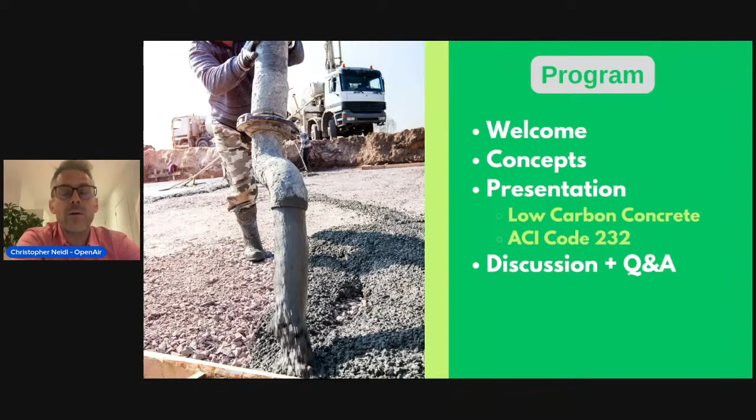So who we have today, Brian might be on already. I'll let him in one second, but we have an amazing panel of folks who have a lot of expertise, practical expertise in this subject and kind of live it every day. Professor Matthew Adams, who you're going to hear from in just a minute, is going to give us our presentation.

Is a longtime collaborator of mine. We've worked together for, I don't know, Matt, probably going back 4 years at this point. He has many different roles, including is really the chair of the relevant committee that developed this code at the American Concrete Institute, which I'll tell you a little bit about. He's also an associate professor at NJIT, and he runs a lab there focused on sustainable cement and concrete.

Kerry Sutton is a senior director at ACI as well, also an engineer, and is really responsible for educating, outreach, and trying to get this code implemented. So we're going to hear a little bit. She will weigh in on some of the technical aspects along with Matt, but can really sort of talk about the steps that are involved in actually implementing a code.

And then we're really thrilled to have Brian Reyes, who's the senior circular economy coordinator for the city of San Francisco's environment department. But prior to that, he was actually one of the key figures who was involved in developing a predecessor program, the first in the country, that Marin County, California, actually came out with, I believe, back in 2019, that was the first to actually introduce low embodied carbon concrete in the building code.

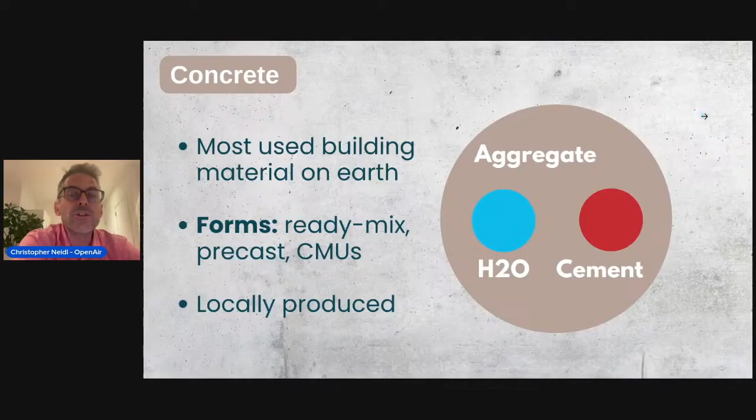It's also the key part of the discussion when we talk about the impact of concrete from a climate perspective. Cement, if it was its own country, it would be the third largest emitter in the world. It accounts for about 8% of emissions. And it's about, depending on the mix, some have more cement than others, but if you take an average, about 90% of the carbon emissions that are associated with concrete trace back just to that one ingredient, cement, which often is relatively small proportionally relative to those other ingredients.

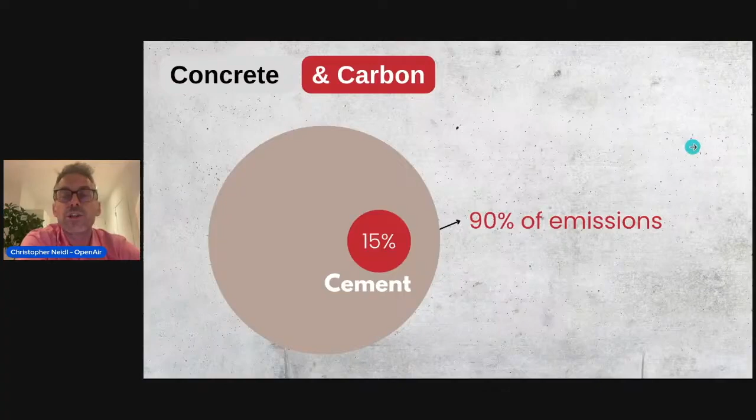A couple of concepts that we're going to be talking about that are important. There won't be many of them, but one is embodied carbon. So some people might, when they think of carbon emissions, think of smoke coming out of a tailpipe or out of a smokestack, and associate it with using things that use energy. That's called operational carbon. Here we're talking about embodied carbon, and with materials like steel and asphalt and glass and concrete, the emissions associated with them are not in their use, but rather in how they're made. And so that's the carbon that's sort of embodied in the process of actually making the concrete before it's actually laid.

And then related to that, ways in which we measure embodied carbon, which we'll be talking about, GWP, or global warming potential. This is a numeric value that basically equates to the kilograms of carbon per cubic yard of concrete. And this is a number that we use to sort of rate all sorts of materials and products, but certainly for concrete, a higher GWP means there's more embodied carbon, and a lower one means less, and that's what we use sort of as our tool of measuring progress or compliance.

Quick thing here, in terms of what we're talking about, are what are the ways in which local governments can be linked to decarbonization? What types of policies or programs or practices can they play the biggest impact? Certainly procurement is one that I've worked on a lot. Governments, local, state, and national, buy a lot of concrete for public infrastructure, buildings, bridges, etc. And somewhere up almost over 30% of all concrete is purchased and used by the public sector. So the governments of all kinds have power in the way they procure concrete. They might mandate that there's a certain GWP or embodied carbon threshold that they reach, or incentivize producers to pursue lower mixes or lower varieties for state work. And we'll talk about that in some future date. It's a really, really important, very active area of concrete decarbonization policy.

But what we're going to talk about today is more broadly in the neighborhood of different regulations, right? And so cities and states often play a really important role in evaluating materials and approving them, those that can actually be used. But the one we're going to be talking about today is the regulation of building codes, how buildings must be built, which has many different facets to it, but concrete is right there. And what we're going to be talking about today is how building codes, the parts that pertain to concrete, can actually now include limits to global warming potential or carbon. And that is the subject of today's conversation.

To spell it out a little bit, there are different varieties of this, and we're going to focus particularly on the ACI code that came out in November. The idea is that in buildings of different sizes, different construction projects that use concrete, the building code establishes a kind of maximum threshold for global warming potential that must be met as part of the building process. That's what we'll be talking about today.

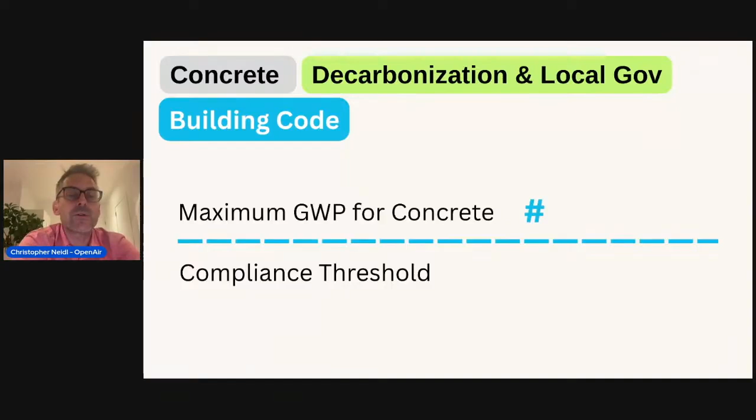It's important to point out, for those of you in California or Colorado, and maybe soon New York City, which has a bill pending right now that would add maximum embodied carbon requirements to a host of different building materials including concrete, these other programs like CalGreen and the soon to be implemented Model Green Code in Colorado aren't exactly the same, but they have similar enough designs that what we discuss today, some of the practicalities of implementation, will be relevant to you if you're in either of those states.

What we're going to do, I'm going to hand it over to my friend and our guest today, Professor Matthew Adams. He's going to talk first about defining, in practical material terms, what low embodied carbon concrete or low carbon concrete is, which is really important when thinking about what we're asking of builders if we were to implement such a code. Then he's going to get into what the code actually calls for and what is contained within it. After that, we're going to get into a discussion that will include you.

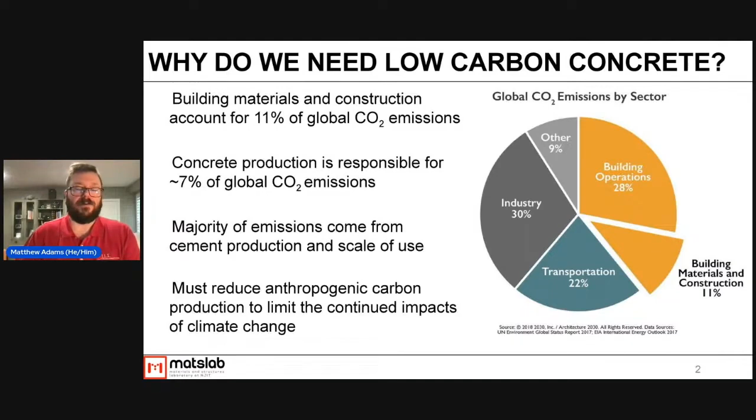The issue here is that we have other sources of CO2 that we're producing at a greater scale, and also we're not constructing nearly as much as some other countries, such as India or Brazil or lots of places in Africa. Despite that, we can still do better. We can reduce our carbon production associated with concrete. And a lot of the technologies and methods that we develop end up getting exported out to other places around the world, and we're also importing ideas from around the world as well. So this is really a collective effort of researchers and policy folks from around the world that we're working with to bring in some of the best ideas.

So what is low carbon concrete? It's a term you've probably heard if you've been here before. Until the code, there really wasn't a set definition for what low carbon concrete is. In reality, it's a performance requirement that is set by your licensed design professional, or LDP, and it's based on reducing your global warming potential below a threshold.

So in order to do that, you have to define a benchmark. You have to set your threshold of where you are in terms of GWP, and you need to define a reduction level. Once you hit that reduction level, you have what is called low carbon concrete. This number can vary because what is low is relative to your particular location. As Chris mentioned, concrete is somewhat necessarily a local material, so the tools we have to make concrete in one part of the world, or one part of the country, are different than in other parts. Concrete can vary quite a bit from location to location, so what is considered a lower carbon system in, say, New York City may not be possible to make in certain parts of North Dakota or northern Canada, for example.

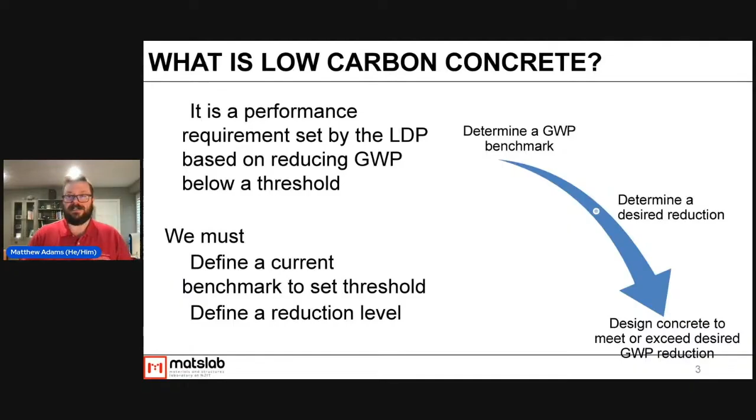So how do we get to low carbon concrete? Like I said, it's a design goal. There are lots of levers and knobs that we can simultaneously use to reduce embodied carbon. Much of this is going to be subject to local availability and cost, so what is available in your local area matters, and working with your local manufacturers is really important. When we're changing from standard practice systems to newer systems, it really requires knowledgeable folks along the entire construction chain - not just the engineers designing it, but our contractors, our suppliers, and all the laborers out there placing the concrete. Everybody needs to understand some of the differences.

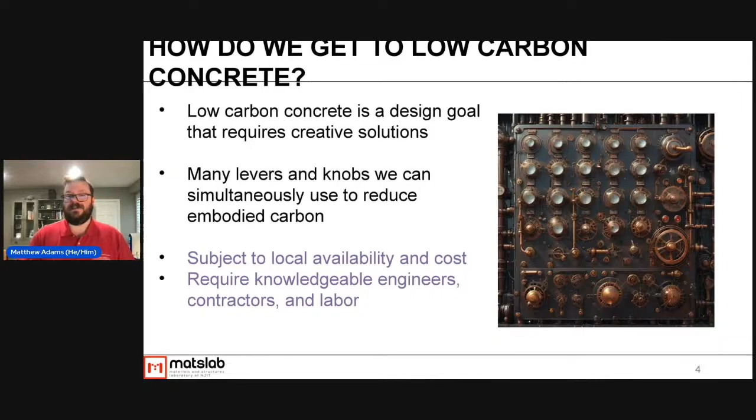If we think about concrete as a cookie - you have your regular chocolate chip cookie, and we can think of concrete in that way. In a chocolate chip cookie, you've got eggs, flour, and butter. These are our glue or our binder that hold everything together, similar to concrete where we have cement and water. When cement, or Portland cement, mixes with water, it does a process we call hydration, and it glues everything together - it hardens up and binds it all. In our cookies, we have filler and flavor - that's sugar and chocolate chips. In concrete, that's sand and gravel. We use as much sand and gravel as we can because it's cheaper than cement, and it also has lower embodied carbon. Then we have modifiers, such as baking powder and baking soda in cookies. In concrete, we use a lot of chemical admixtures and perhaps some mineral admixtures. These help change some of the properties.

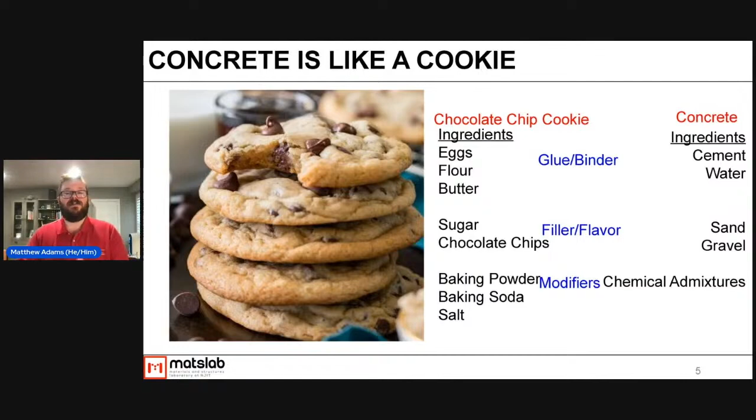Like a chocolate chip cookie, though, there isn't just one way to make concrete. We can change out all of our filler and flavor, and we can change out the types of binder ingredients we use. There are lots of different tools out there that we can use, and by making some of those changes, we can start to see reductions in carbon emissions.

Sorry, I lost an image on here - it went away. But basically, this image should show a bag of cement, and it should say lower carbon binder systems is one way. There are many different types of binders we can use outside of just straight Portland cement, and these can have lower embodied carbon. These might include replacing part of the cement with waste materials like fly ash, which is a waste product from coal burning, or slag, or ground glass. This can also involve complete replacement of the binder with something else - we see this in what are called alkali-activated systems or geopolymers. We also see other types of materials like calcined clays, and biochar is starting to get a lot of attention lately.

So that's one way we can reduce emissions, by replacing high-emitting cement with materials that emit less or are waste products. We can also work on reducing the overall binder content, the total amount of cementing materials, by increasing aggregate content. That requires engineering our aggregates to understand how they fit together. The more we can pack aggregates into the system, the less glue we need to hold them together. Finally, we can use more recycled materials in concrete, things like recycled aggregates, glass, and plastics. These are all being studied for use in concrete, with some further along than others.

I do want to point out that you need to be careful, though. There are a lot of folks out there selling carbon-negative or carbon-zero products that are magically going to reduce the carbon in concrete. These all come with pros and cons. They're going to change some properties of concrete, whether that's how it's placed, how fast it sets, or how fast the bleed water sets. You really have to understand that before you go and use them.

The issue is that a lot of these policies are great, but they're all being developed independently of each other, and so there's a lot of variation in methodology. Most of them are requiring what we call prescriptive limitations, so they're really stifling innovation and flexibility within concrete design.

Additionally, some policies are being proposed that list really unrealistic or unattainable long-term goals. Like I said in the last slide, we don't really have a method of getting to zero carbon yet. Net zero is a different question in terms of buying offsets - that's outside my realm of expertise, whether offsets work or not. But we don't have the tools in place to get to zero right now.

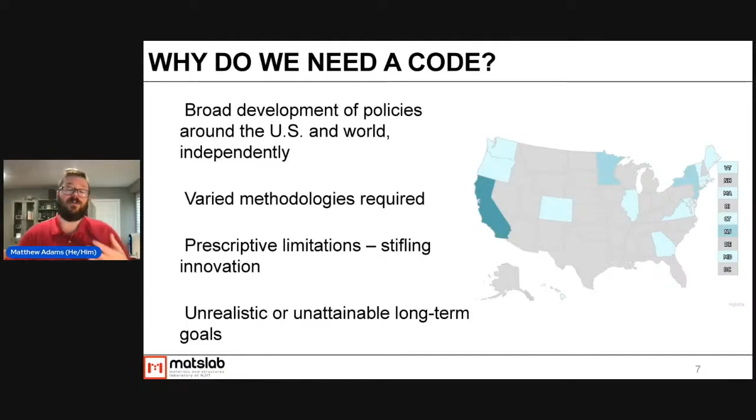And so we're seeing policies being proposed that say by 2040 or 2050 we're going to get down to zero carbon associated with concrete. We want to be really careful about policies like that, because when we put in policies that are not attainable, they end up just getting ignored. So we want to move forward with realistic and attainable policies.

So this led us to developing this code. The need for it was out there as we're seeing people trying to work on how to get to this, how to set requirements. This code is the first of its kind in terms of model building codes worldwide. It followed a consensus process, meaning we had a group of people come together and agree on best practices. Once we had approval within the American Concrete Institute, it went out for public comment.

And during that consensus process, we have to not just look at every public comment that comes in, but respond to every comment that comes in. So we can't just look at it and ignore them - we need to have a response.

This code provides designers with a method of setting GWP requirements for concrete associated with their project. Currently, the code only applies to ready-mix concrete within a strength range of about 2,500 PSI to 8,000 PSI. We're looking to expand that - hopefully we will include precast in the next round.

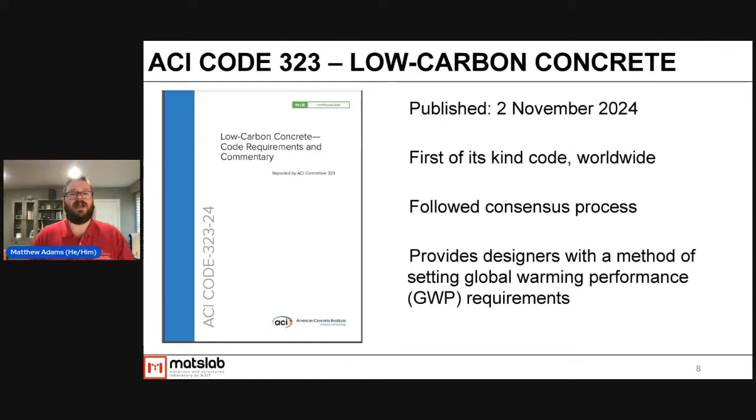The reason why we were limited was, one, we limited the scope to get something out quickly because the need was there. And two, there's a real data issue in terms of setting benchmarks and thresholds. We don't have a lot of widely available data on the global warming potential of concrete that's currently used and really project-specific global warming potentials. There's lots of great industry-wide and national averages out there, but that's not really good data in terms of getting a realistic picture of what's out there.

There are three main ways that we see limits being set for carbon emissions with concrete. One is called what we call carbon limits. A second is a carbon budget, and a third is a weighted carbon budget.

A carbon limit sets a global warming potential limit for each class of material, meaning on a regular concrete project, you can use 10 to 15 to 20 different concrete mixes. Each one of those mixes will be required to be below a specific GWP threshold. Those limits are easy to set, but they reduce flexibility in design, and often they can lead to increased volumes.

Generally, we assume that the higher the strength of a concrete, the higher the GWP. And so what we see when we say that all concrete has to be below a certain threshold is that people just increase the amount of concrete that they're using to offset having to use a slightly lower strength. This area is really where most of the policies nationwide are right now. Again, it's a good first effort because it's fairly easy to access and get some data to set this, but it does lead to low flexibility.

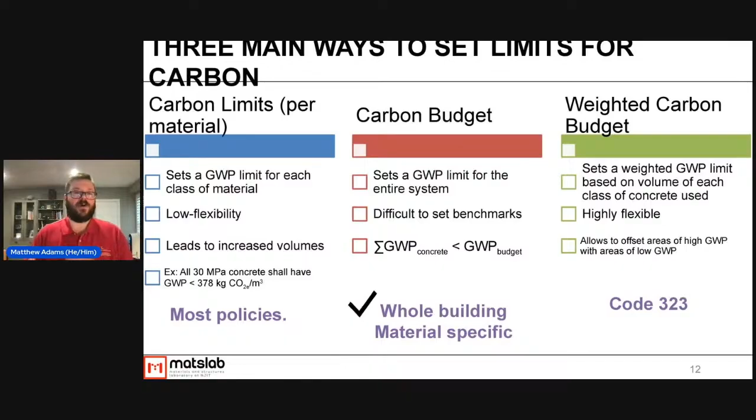We really worked hard in our committee to develop the right guidelines for this. This really comes out of having concrete engineers and designers developing the policy language rather than folks that are not quite as focused on how the material works.

So just an overview of the process. Again, I'm not going to get too in depth on this. There are a number of YouTube videos out there where I really dive into the code. But for the code, you're going to choose a type of project that you're doing. So it could be a building, a pavement, a bridge. And we look at the entire project that is being bid out.

So if you're building an entire community of homes and that's one project, you would include all of the concrete within that community of homes. How you define a project is set in some of the guidance in the code there. You then are going to choose a compliance path, based off of the size of your project, and we have three different paths.

So for the highest tier, the largest projects, you're going to have to limit your GWP below a certain benchmark. This isn't about taxing projects, but about putting costs associated with implementing this on projects that can bear that cost right now. This is a new process, it takes time for people to learn how to do it, and time costs money in terms of engineering. So we don't want to overburden smaller projects because it's going to make it harder for the code to get adopted. Our second tier, mid-range projects, requires people to submit all the documentation associated with it, but you're not actually required to meet any benchmark.

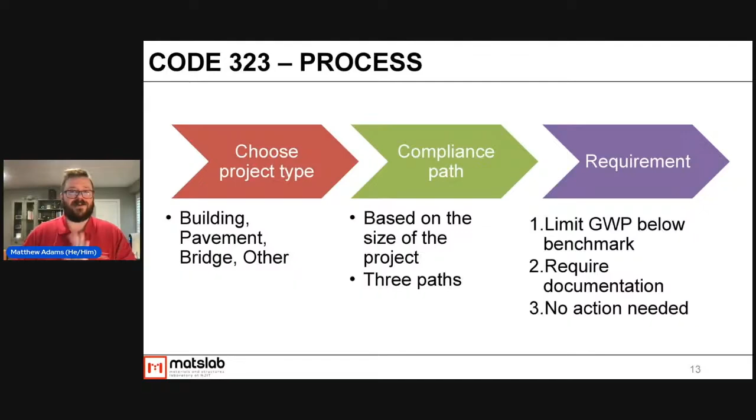So with that, I'm going to end there. I know there's probably lots of questions - this doesn't answer everything, but we're going to answer some more questions throughout the next part.